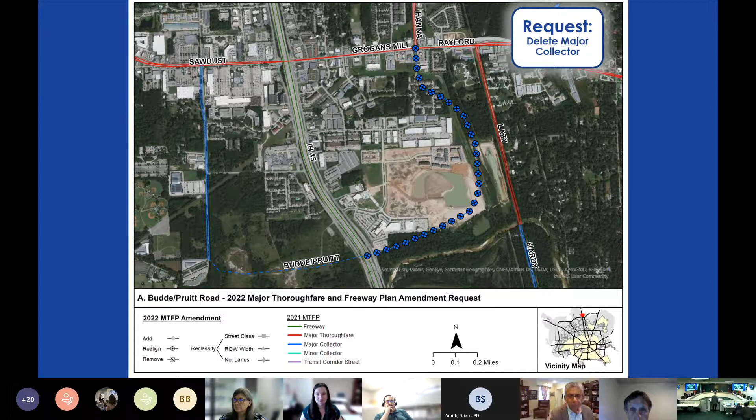Yes, ma'am, that's correct. Any questions or comments, commissioners? Okay, thank you. I think we got that.

Great. The next speaker is Amendment B, Fulton Street, San Jacinto Street, Ralph DeLeon. Mr. DeLeon, are you virtual or in person? I'm here and I'm virtual. Can you hear me? Hi, go right ahead. All right, thank you.

So I'm the administrator for TIRZ 21, that's the Hardy near Northside Zone. We are asking for the connection between the terminus of San Jacinto to Burnett to be removed from the Major Thoroughfare Plan. It has been on the plan for some time.

I did provide a more detailed backup in the application. I'm looking at the report that was provided for you folks; it does provide good background. When this particular item was put on the Major Thoroughfare Plan, it did not contemplate the future construction of the light rail on Burnett Street, on Fulton Street. It did not contemplate the future realignment of I-10, which is going to move north. It did not contemplate the Elysian Viaduct project or the Hardy Toll Road Connector project. And so it's actually a bit outdated, in the sense that there are other options coming online.

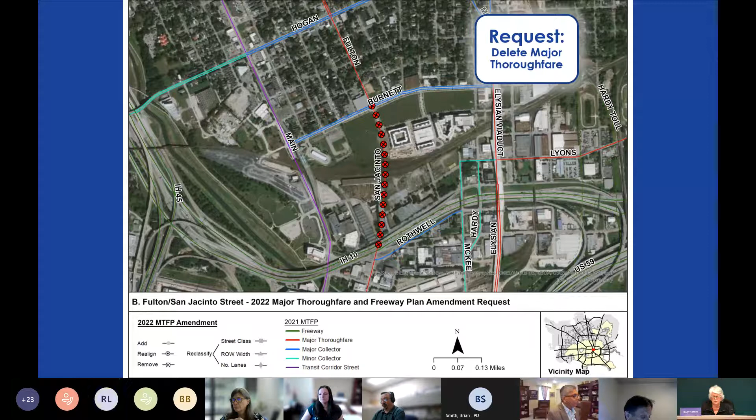I think we're okay. Mr. De Leon, will you be working with our staff on behalf of the TIRZ as we go forward and review these? Yes. Okay, great.

If there are no questions, we will go ahead and move on. And this is what we're asking, to remove it from the plan entirely. Yes. Okay, thank you.

Okay, the next speaker will be on Amendment C, South Wayside Drive, Carmen Pearson with Lovett Industrial. I think this will be virtual as well. Carmen Pearson, are you there? There you are. Hello? I think you are muted at this point. Ms. Pearson? Yes, hey, I heard you say yes, can you hear me? Okay. Yes, now we can. Go right ahead.

Okay, great, thank you. So this project, can you go to the next slide please? This project is located just south of 610 along Mykawa, about 1 mile south of 610, at the intersection of Mykawa and Dixie Drive. Next slide please.

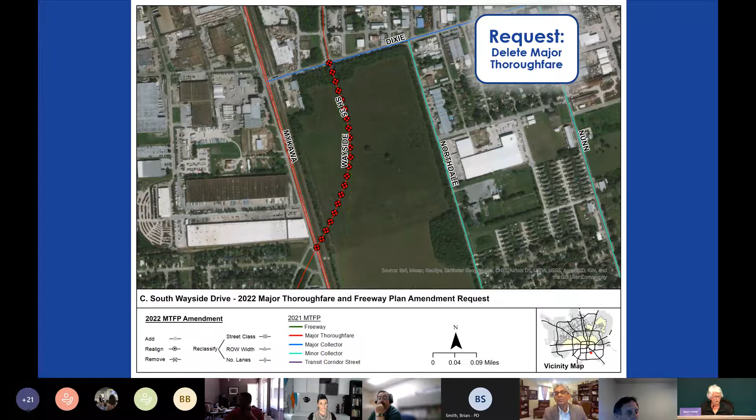Okay, so we move now to Item D, Fondren Road, Gerald Grissom. Good afternoon, Planning Commission. My name is Gerald Grissom with BGE. The amendment before you is for the alignment of Fondren Road, located in Fort Bend County, City of Houston city limits, District K.

We're proposing to simply move the right-of-way east about 587 feet. This will have several impacts to the region. There's an existing Fort Bend County drainage channel fee strip. The current alignment crosses that channel at a 33-degree angle and is approximately 225 feet long. Our proposed amendment would change that very acute angle to 72 degrees, making it much more acceptable.

It also reduces the length to 165 feet. The current alignment bisects a tract. It was one of those that, like you said earlier, was greenfield with no real plan, just lines on paper. Now we actually have interest in development in the region, and that's the reason for the amendment. The developer is proposing light industrial warehouses in the area, and that's really the main reason.

We have support from Mayor Pro Tem Castex-Tatum, a letter of support. We also have a TxDOT letter of support since it ties into McHard Road. They prefer the alignment at this location because it centers Fondren Road between Fort Bend Parkway and Blue Ridge Road. So overall, we believe it to be a positive improvement for this right of way.

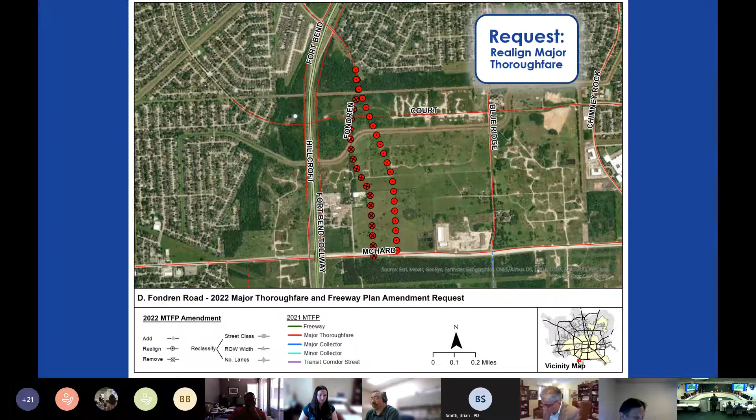Okay, we move on to Amendment E, Madden Road, Jennifer Curtis with Meta Planning. Good afternoon, Madam Chair, Commissioners. My name is Jennifer Curtis with Meta Planning and Design, representing Madden Road. The site is located in Fort Bend County.

Madden Road is a collector street. It extends east-west for just a couple of miles. The portion that's the subject of this request is just barely south of an adjacent east-west thoroughfare going the same direction—that's Bissonnet. The request is to delete the proposed segment of Madden Road and realign a small portion to continue following the existing pavement of Madden Road that we would want to tee into Westmoor.

Westmoor is a future north-south collector street. The area of Westmoor and the northern portion of Madden is part of the Trillium single-family development currently undergoing development. Fort Bend County has already heard this amendment request at Commissioner's Court, and they have agreed to remove it from the Fort Bend County Thoroughfare Plan. So we're simply asking for the Houston Thoroughfare Plan to match.

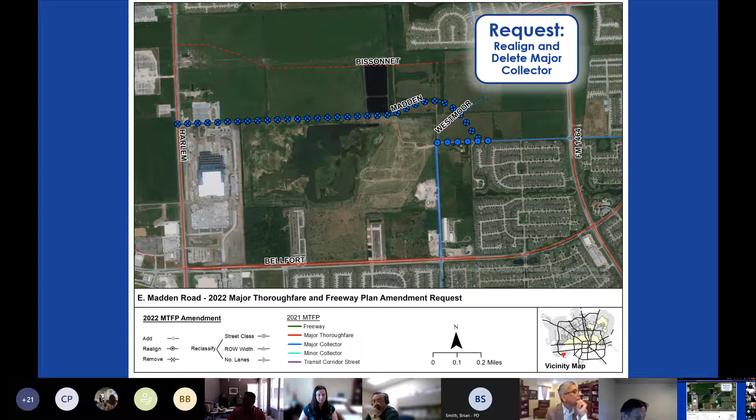This would align our plan with Fort Bend County's plan. So the request is to delete this portion. Okay, questions, comments? Okay, I think we got it. Thank you.

F, West Airport Boulevard, Allum Road, Rodrigo de la Garza. Good afternoon, Madam Chair and members of the Planning Commission. My name is Rodrigo de la Garza. I'm here with Studio Red Architects, and we represent the owner of the site, Nueva Jerusalem Church. With me I have Irving Sanchez and his father, the pastor, Jose Sanchez.

We're here to request your consideration for the deletion of the West Airport Road section from the West Airport existing termination at Stone East Drive to Hiram Clarke Road.

I'm going to give you a little background on the church. The Nueva Jerusalem Church serves a diverse but predominantly Hispanic community of Southwest Houston. It's a fast-growing congregation of nearly 4,000 members. In order to accommodate their fast growth, the church hopes to build an 8,000-seat church and a kindergarten through 12th grade school that would serve a student body of nearly 1,000 kids.

It's an exciting project that would include a daycare facility, youth ministry, outdoor gathering spaces, walking trails throughout the site, and a large flexible place of worship with retractable seating. It would be designed in the style of a conference center, a multipurpose area available to the community for large gatherings such as conventions, sporting events, and training exercises.

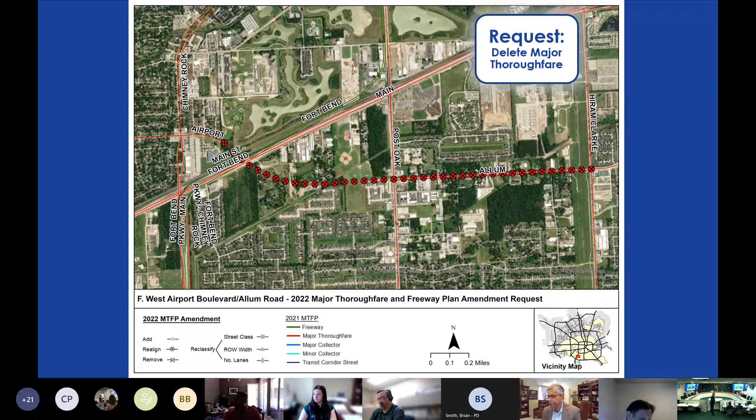Thank you for being with us today. Okay, so do we have any other comments on, are we on West Airport? Yes, West Airport. Is that, we're done? Okay, thank you so much. We'll look forward to working with you.

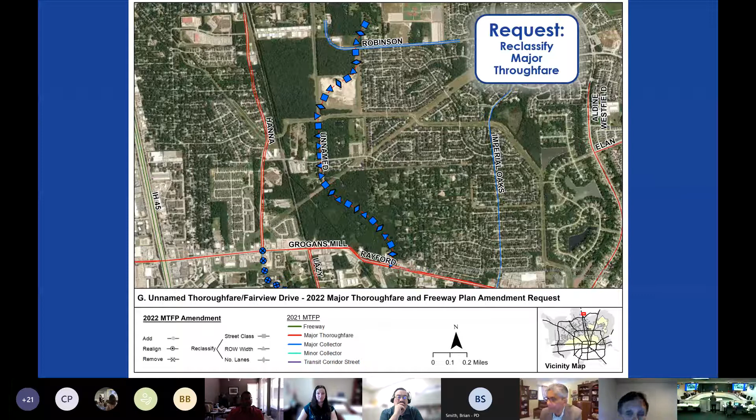Then we will move to G, which is Fairview Drive and an unnamed thoroughfare. Adam France with BGE, Fairview Drive / unnamed thoroughfare. This thoroughfare was added to the Montgomery County Thoroughfare Plan in 2016 on the plan that HGAC did. City of Houston then adopted it on theirs in 2021. Montgomery County's thoroughfare plan was amended, and this particular segment was downgraded or reclassified from a major thoroughfare to a major collector. So we're asking that the City of Houston major thoroughfare and freeway plan be amended to match Montgomery County's plan. Any questions? No alignment change? No alignment change, no sir. All right, thank you very much.

Okay, we are on H, North Park Drive.

George Lee. Yes, this is George Lee with Skymark Development.

Skymark Development, on behalf of Hanover Estate Ltd., is requesting the deletion of proposed major thoroughfare North Park Drive between Salters McLean Road and Townsend Boulevard, to be deleted from the City of Houston major thoroughfare freeway plan. Back in August last year, Montgomery County already adopted the amendment to delete this portion of North Park Drive from the major thoroughfare plan.

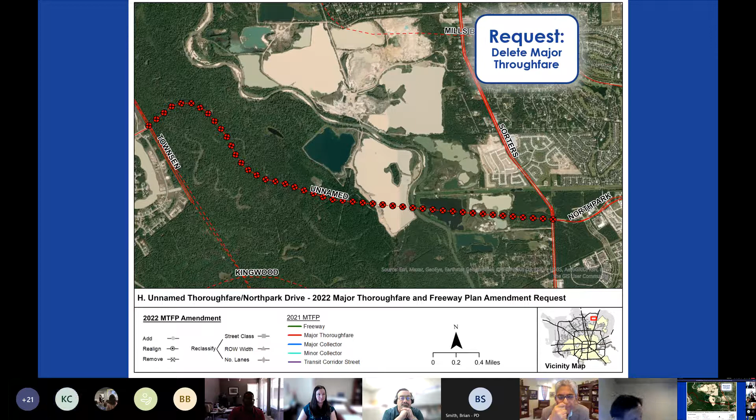So we are asking the city to do the same to match their plans. Any questions? Any comments from our Montgomery County representative? Hearing none, okay. We do get support from the Montgomery County Precinct 4 Commissioner. We have a support letter from the Commissioner, so Precinct 4 Montgomery County is in favor. Okay, no questions? All right, thank you. We will move on.

I West Road, Blake Wiemeyer. Good afternoon, Commissioners. My name is Blake Wiemeyer, appearing on behalf of Boyer Properties, as well as Mr. Robert Thomas and Mr. Lionel Rodriguez. Those are the three property owners affected by the deletion of Pinafore Lane that I'm requesting.

Next slide, please. This particular street is located in the Aldine area. Next slide, please. Go to the map. The portion I'm requesting deleted is Pinafore Lane from the east side of Luthe Road to the west side of Reeveson Road. The tract that Boyer Properties owns borders Luthe Road, and the tracts that Mr. Thomas and Mr. Rodriguez own are the tracts where it takes a dive to the south. This particular area is outside the city limits, in the city's ETJ.

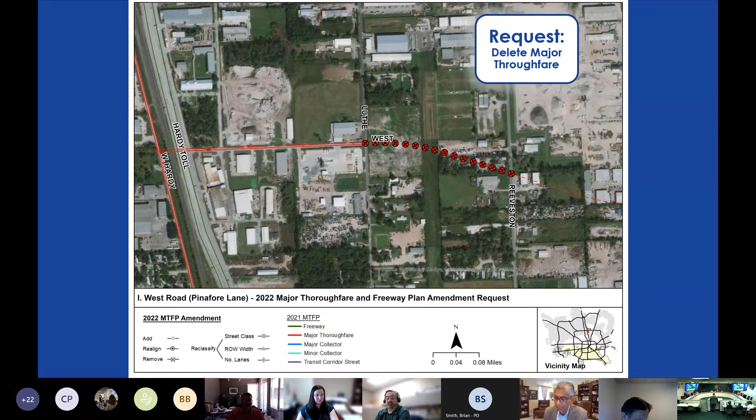All right, J. Louetta Road, Adam France. Back again. Good afternoon, Commissioners and Madam Chair. Thank you for the opportunity to present again. This is Louetta Road, located in Harris County Precinct 3. I don't know if y'all are familiar with the Dunham Point development or not; this is located within that development.

We are requesting deletion of Louetta Road south of US 290, from US 290 to Mound Road, and then the major collector from Mound to Jack. On July 20th of 2021, the property owner executed with Harris County's Commissioners Court a memorandum of understanding in support of this deletion, so I'd like to bring that to your attention. There are also several physical encumbrances that would make this particular alignment very challenging. When US 290 was reconstructed, there is an exit ramp on the north side that's at grade, and on the south side there's an entrance ramp at grade, which would create a major conflict point. There's also no grade separation provided where Louetta would cross US 290.

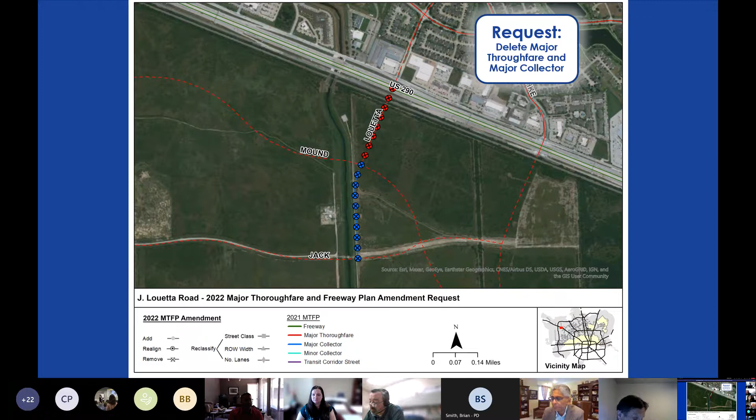Questions? Any questions? We're all right. Thank you. Good, thank you.

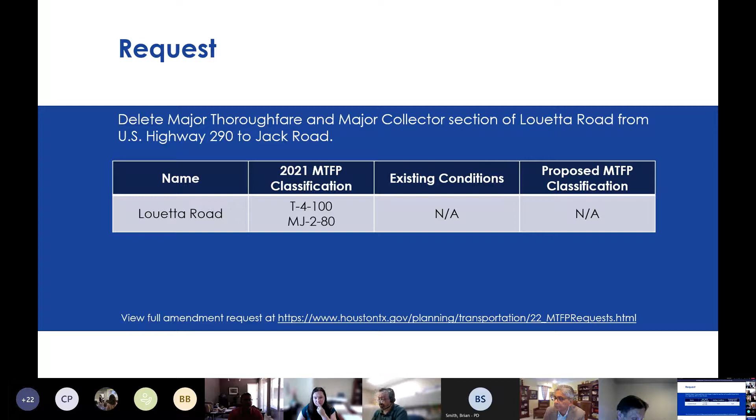Okay, now we get to the Kingwood Drive package. There are 5 separate amendments. Ms. Curtis is here. Document camera, please, HTV. Sorry, thank you for having me back again. Jennifer Curtis, Meta Planning and Design. I apologize for the large set; I will try to go as quickly as I can.

The amendments are collectively under the name Kingwood Drive. There are 4 separate streets, largely all in the same area, and not necessarily all connected, but related.

One of the major factors in this area is the floodway and floodplain of Luce Bayou, or Lucy Bayou, variably known. It's hard to see on this drawing; we weren't able to get the floodplain and floodway on the slides in the slideshow, so I wanted to briefly bring your attention to that creek that goes through this property. The scale is deceptive—the floodplain and floodway ranges between 1,000 and 2,000 feet wide in this area, and those are pre-Harvey measurements, so it's very, very substantial.

Had a brief conversation with Harris County Flood Control about this property, and they were, of course, very concerned about having major impacts to the floodplain and the floodway in this area. So that has been a driver of several of the amendments I'm about to present.

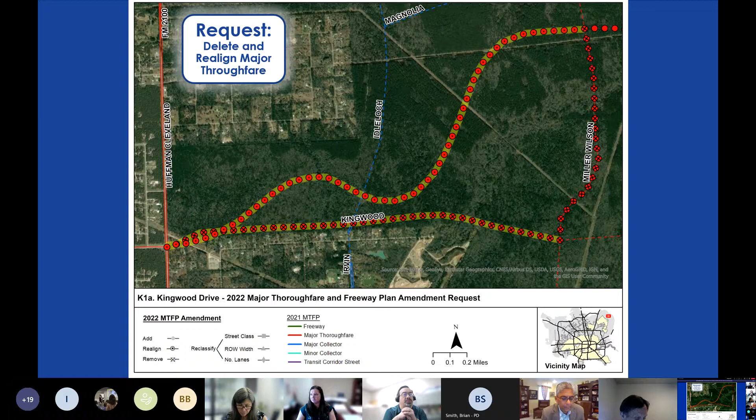That exit point on the east also leads to 1B, which is to add another segment of Kingwood. That northern entry point of the realigned Kingwood is a narrower crossing of Luce Bayou, and it also puts us directly in line with the Grand Parkway, which has pretty much finished construction and is just about to open in this area. That has really opened up development and added a lot more certainty.

South here hits an underpass only for the Grand Parkway, so there are no ramps. This connection hits that interchange, which is much better for regional mobility, and also continues further east on Liberty County's major thoroughfare plan, and the city of Dayton goes all the way east to FM 321, which is a major north-south route. So we feel this connection stitches together a much stronger regional network of east-west and north-south connections for the community. That's Kingwood A and B in a nutshell.

So will there be development there in terms of this big wide floodplain? Or get the road out of the way - where will the development be?

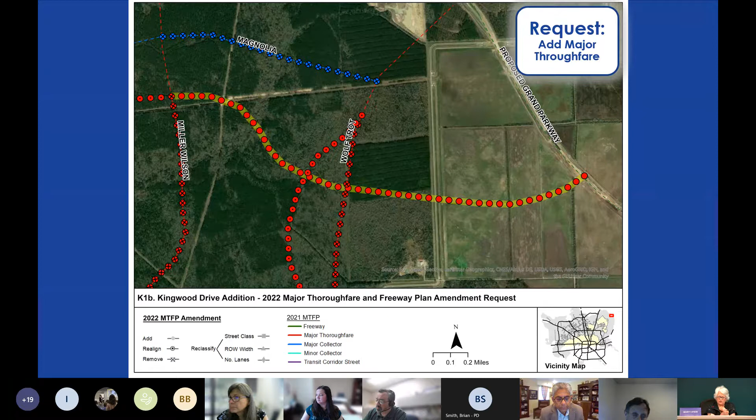And would the connection with the other Kingwood require going further to get there, or could you still access through the other interchange? If we could go back to the road map briefly - I think it's the second slide in the slideshow before this one.

There we go - right there. So you can just barely see to the south the portion of existing Kingwood today, and we're not proposing to change that. That's not within the scope of our development, and it still serves east-west mobility between Miller Wilson and the Grand Parkway, where it has an underpass.

We're adding an additional thoroughfare to the north, which would be New Kingwood. Okay, got it, thank you. Sorry, we good? Go ahead - we didn't mean to interrupt. Can we go back to B?

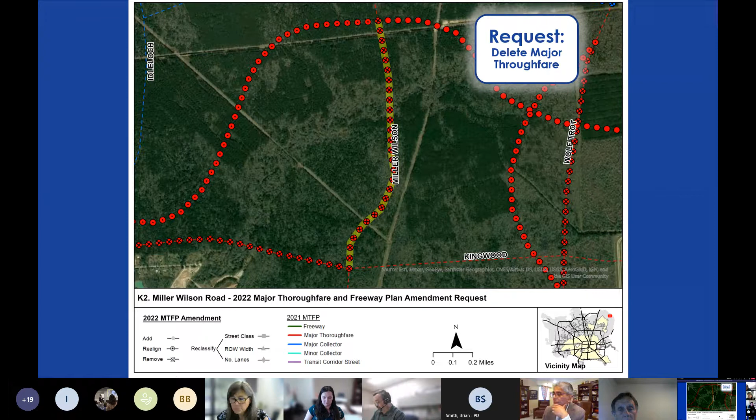Miller Wilson Road goes directly across the floodway of Luce Bayou, similar concerns to the previous segment. The floodway and floodplain here is about 1,100 to 1,600 feet. The special challenge is that to bridge that, the two sides would involve two separate property owners—my client doesn't control the southern landing point. Very challenging to construct, a very wide bridge, with impacts to the floodplain and floodway. Given the complexities, we're requesting to delete this segment of Miller Wilson where it crosses Luce Bayou.

That's the request to delete. Okay, yes, please, Magnolia Lane.

Magnolia Lane is a major collector, just 2 lanes wide between Wolf Trot and FM 2100 on the northern portion of this area. I believe it was added to act as an intermediary between Kingwood to the south and the next thoroughfare further north, since they're about 2 miles apart with no thoroughfare there. It was added to bridge that gap. But since we're proposing to add Kingwood as a new thoroughfare, we want to minimize crossings of Luce Bayou, and we think the new thoroughfare will take the place of the traffic Magnolia was intended to handle.

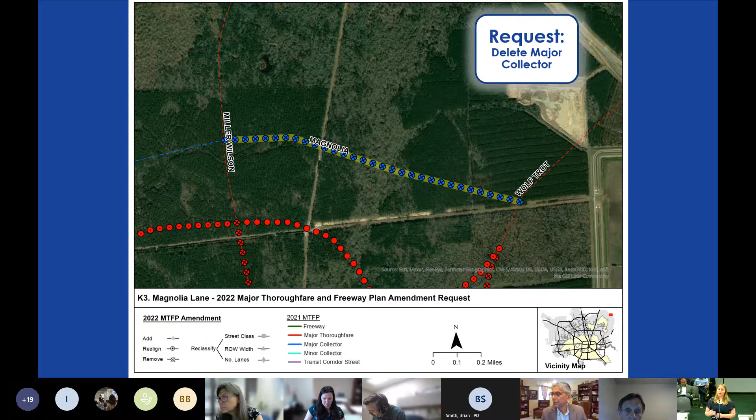So we think an additional major collector crossing is not needed, since we're now having thoroughfares at a 1 mile grid. The request is to delete the portion of Magnolia that crosses the creek, very close to the thoroughfare we're proposing to add.

Next is Wolf Trot Road. The request here doesn't have anything to do with floodway and floodplain. This segment appears to straddle several different property lines, and it's really a question of interpretation that hasn't been clear over the past few years—where a thoroughfare straddles a property line, is it meant to be split half and half between developers, or all on one developer? Where it's all on one developer, usually the interpretation has been that we can realign it within our property, but that hasn't always been the case.

So really this request is asking: is an amendment required for us to move it around in our property? Or if it hugs the property line, can this action define that it hugs the property line, or that it's inside our property and we can adjust it? That was the purpose of bringing Wolf Trot to your attention. It's unclear, and whether it always has to be the same interpretation has also been unclear. The interpretation seems to have been fluid in the past few years, which is specifically why I wanted to bring it up.

And that's the end of my presentation.

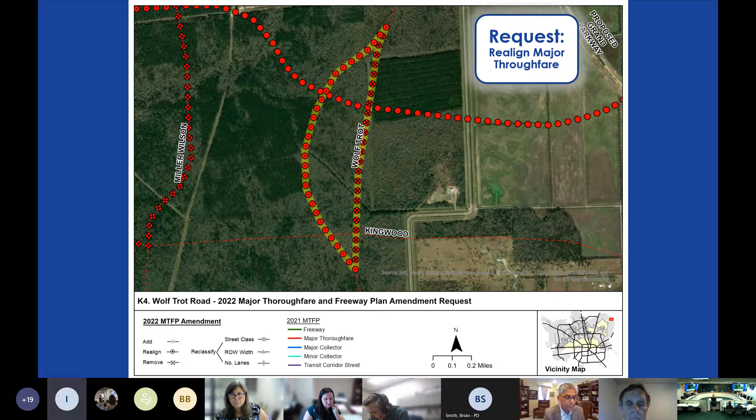Okay, any questions? This is complicated—are you working with Harris County on this? I think Fred, and, gosh, I can't remember his name, someone from the transportation group, in a couple of different meetings early on. We've been talking about this since last year. I had a phone call with the Liberty County engineer regarding the addition of Kingwood. We had conversations with both of the other affected property owners between us and the Grand Parkway, and they were all in support. We also had a call with flood control, so we've been trying our best to reach out to our neighbors and make sure this is all kosher.

Commissioner Smith: I'll point out a macro issue, and then as Ms. Curtis has pointed out, there are a lot of details that follow. I'll point out one interpretation I had on the handout map—if staff could show this, it would help, or if you look at the document on the lower camera. In the exhibit, Huffman Cleveland is the state maintained FM road, and the Grand Parkway cutting across the northeastern part of the exhibit is another state road. Currently, I believe those are the only two crossings of Luce Bayou within the stretch we're looking at—is that correct to your knowledge, Ms.?

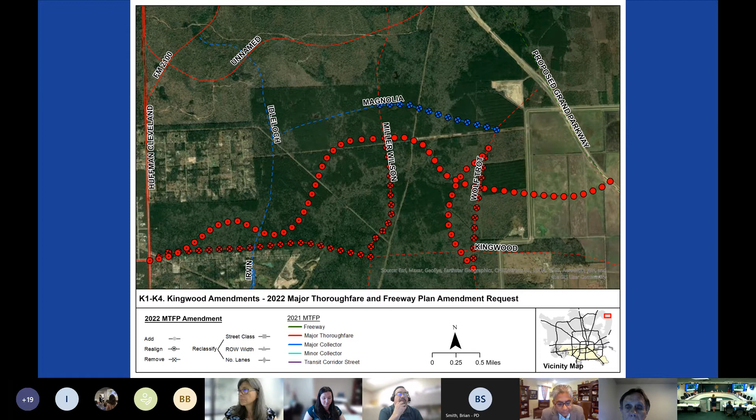Okay, well, everybody has a lot of work to do over the summertime. Thank you all presenters for doing such a great job at being brief. We're here, like, we have another half hour. So what do you want to talk about? We could go through the definitions and abbreviations of everything. Yeah, we could go outside and get some exercise.

I think Ms. Moses Burnside has some next step comments. Yes, so we're going to go ahead and wrap this up. I want to thank you all for your time today. I do want to mention, before I go through the next steps, that we are in the process now of interagency coordination. This is where we begin to bring in Houston Public Works and flood control, so we will have more information for you at the public hearing regarding those concerns. Thank you for making mention of that.

So our next step, you can go ahead and start clicking. We've already done the Planning Commission workshop. We've got the public open house coming up. I do encourage you all to attend. What date is that? I can't see it. It's June 15th, in the evening. If you can attend, please join us. It's only a virtual meeting, so please attend with more questions if you have them.

Then, of course, we're going to move from that to the public hearing, where we'll have more information for you. And then the commission action meeting, which is on September 1st. All we ask is that you all make a decision and please forward this information to City Council by September 30th as required by the ordinance. Okay.

Thank you. And also, if any of the commissioners think of additional questions, Sharon's your person to communicate with, and she'll make sure those get put into the mix. Email me, give me a call, look on the website. You're welcome to make comments and let us know what you think and what your concerns are, and we'll be happy to address those as we go through the process. Okay, thank you. Any other questions?